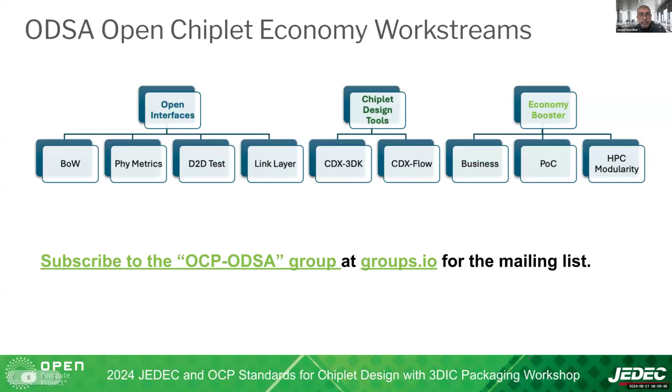As Jawad pointed out, CDX is just another work stream under the old ODSA or Open Chiplet Economy. So we're focusing on the standardizations. That's why we have this workshop, and we'd like to hear from everyone in the industry about the challenges that they're facing in the business regarding the standardizations, especially in the 3D IC design and also the chiplet.

Where they are getting to more like plug and play and a lot like sharing resources. So we definitely want to hear more from you about the challenges today. We already have the CDXML, the standard, which is incorporated with the JEDEC part model, JEP30. We're also working right now on the material design and also assembly design, and also like the testing design kits.

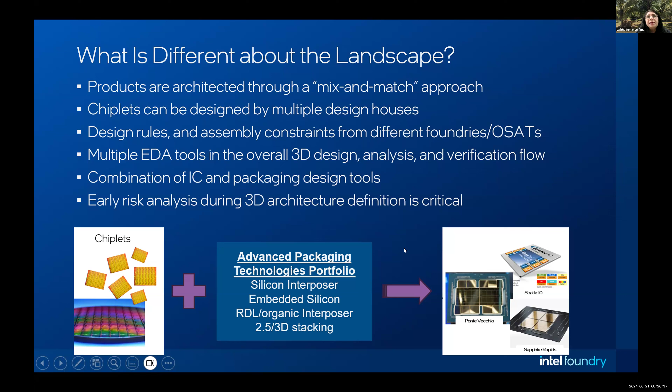Way before you get into an execution phase, you need to know, hey, am I meeting the performance criteria? Am I not? I need to make sure that the package costs are less. How am I going to test this whole system? So that's where, with chiplets and the advanced packaging portfolio going towards really generating products, the landscape warrants a different kind of mindset in the industry.

So what are some of the challenges, right? Disaggregation strategy. How do I partition? What silicon nodes do I pick? Die-to-die IP, which die-to-die IP? You mentioned several names, right? Is it UCIe? Is it certified on a bridge or on an interposer? What are the bump pitches and decoupling capacitance aspects I need to worry about? What packaging do I need to choose?

This phase of planning is where, I have to say, this has been a pitch I have been doing for the past decade. We have come some ways. I have to thank the EDA partners that we work with. They have come a long way in terms of putting together some co-design planning systems, some great multi-physics changes have happened in dealing with the complexity and scalability, but still, there is a lot of custom engineering.

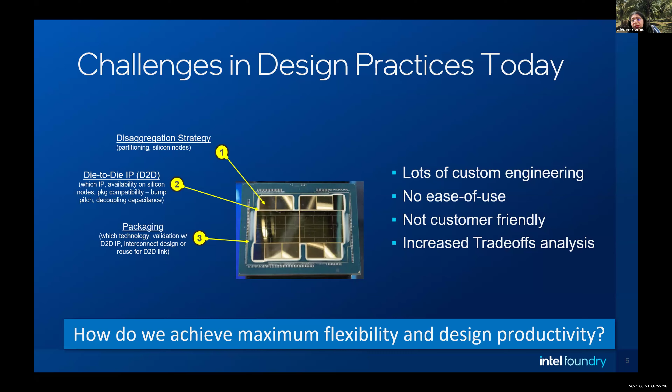We really want some kind of a 3D IC design enabling kit that comprehends the technology aspects and gives us a reference flow so people can use it. I think we need to compete on coming up with optimum architectures, not on the standards. So the emphasis on trade-off analysis also increases. So how do we achieve maximum flexibility and design productivity without impacting the timelines? So this is what I think should happen, right?

Right here to the left, I'm showing an example. I think this is PVC. Look at it. It has 47 pieces of silicon in one package, 3 foundries, 5 silicon nodes, and you're looking at the transistor count, fairly complex.

So to enable a lot of things like this, whether it's AI or HPC segments or even co-optics, for instance, we need to have a very nimble co-design system that drives integration amongst the die, package and board design tools. The design kits should have an end-to-end focus. We need to stop paying myopic attention to each area.

At a holistic level, we need to know that, hey, even before I start doing my floor planning or taping in the package or the board, I can come up with an optimum architecture bearing the signal integrity, power delivery, thermals, warpage, and what form factors can I even afford? All those trade-offs need to happen in this co-design system.

And then comes the burden on the ecosystem and standards. All the standard IPs, whether it's a bunch of wires or UCIe or anything else, need to be validated and standardized for the packaging technologies that are being leveraged within the industry, right? This can be die-to-die, this can be off-package IP, advanced packaging, and EDA should really move to CAD-agnostic standards, right?

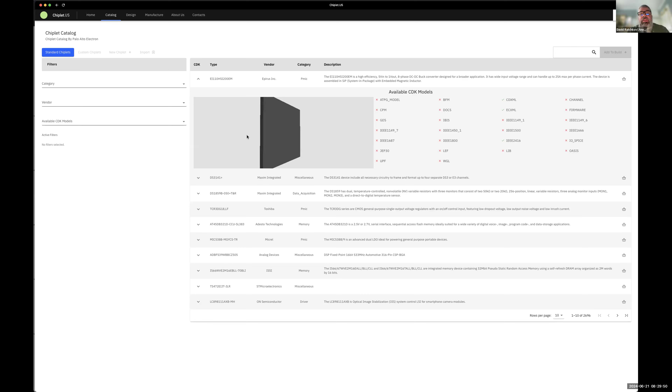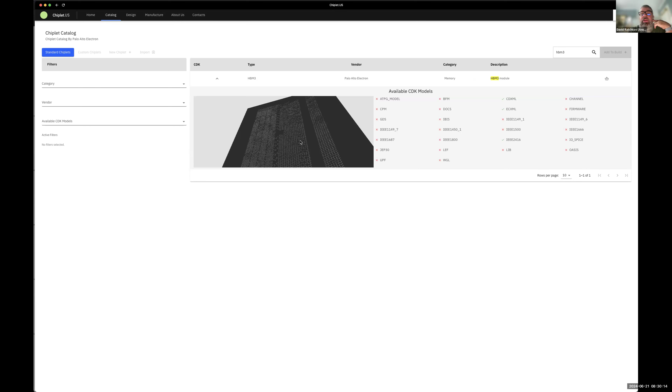Here is our website. And most importantly, we have a catalog of chiplets. There's standard chiplets and custom chiplets. If we look at some of the interesting chiplets, here is an IVR from a partner company that supplies integrated voltage regulators. Another cool example is an HBM3; this model was created by Palo Alto Electron, and you can see we have all the details for the HBM, and you can come in and actually use this. And you can publish. So again, please join us if you're interested in this. It's straightforward, it's free, and we would like to work with you.

This is where the top of the ecosystem is: the availability of chiplets and the ability to find and integrate them together. Next, you're going to be working with several different things. One of the most important pieces of data that you would need is what materials you are going to be using, especially for your substrates, any attachments, things like that. You would need to work with materials. So for that, we have actually created at Anemoi Software a material design kit that looks like this.

It's free to sign up here, and you can create your own libraries. The coolest part of this is you can actually share this with friends. One of the most difficult pieces in materials is that you always have to go and dig up a PDF file and then pass numbers by email to somebody and try to enter them in a tool. This kit here would allow you to just share the materials. And most importantly, if you use the material and you change something, we can warn you that something has been changed.

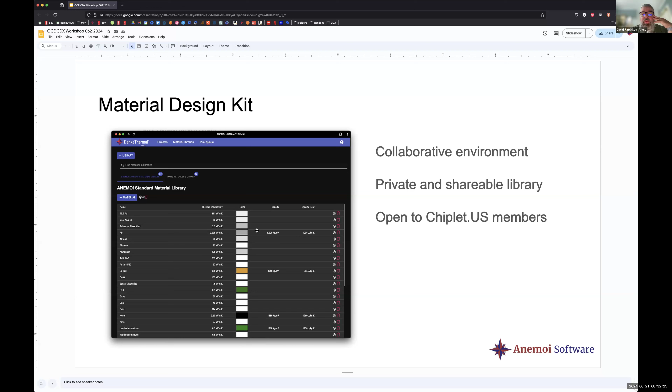So you are on top of any changes and you don't use any stale numbers. So material, James and team have been working on refining the definition of material, of what's in the material design kit, and we are implementing those changes. So again, this is open to Chiplet.us members. It's free. We would like to enable everyone to use the same values, right? So that we can reduce any possibility for mistakes.

Next, when you're looking at a top-down system, you are going to be looking at the physical aspect of this. How do I place these things together, and what will happen when they're together? What would my thermals look like? What would my mechanicals look like, right? Would that work together at all? Can I place them? And for that, I'll show you a live demo of the same tool.

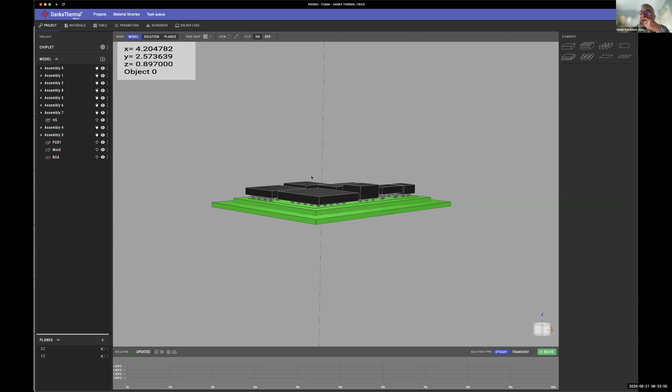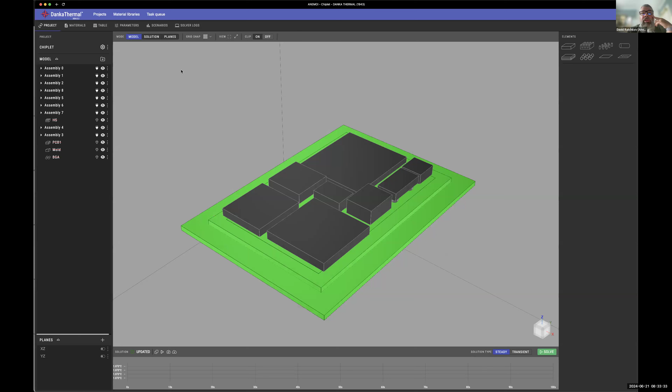Here is a simple chiplet system that was designed, right? We can look at the Z heights, we can look at the BGAs, we can go and create that very easily. Again, this is standard file input output. So even if you come in and just create this, you can always get standard ECXML out of this, and then you can go into any other tool which you want. Again, open standards are the key for an open chiplet economy. So we are determined to support those.

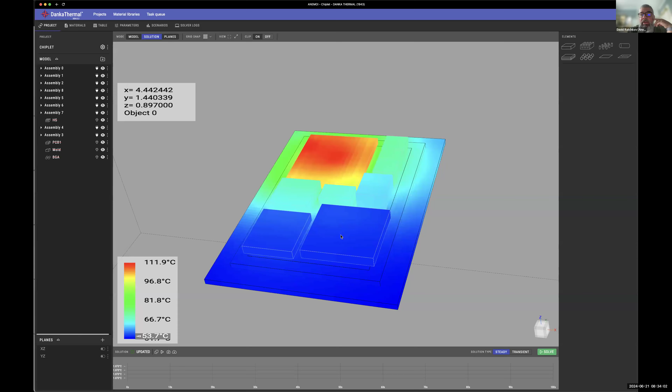And then you can look at the thermals from different points of view and see how things are coupled thermally, where the hotspots are, how the heat is propagating to other components, and so on. You would get different components with different ratings; probably the best example is memory modules, which would have a different rating than the standard ASIC. So you need to be concerned about how heat is propagating to those components, and then figure out the rest of the system. What does the heat sink look like? What would serve my thermal target? And look at the BGAs and so on.

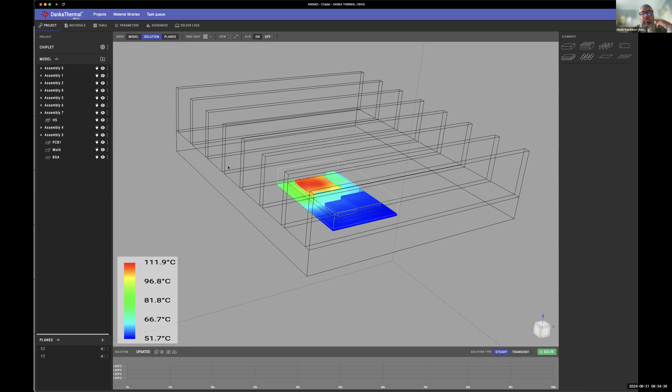So, okay, switching gears again. I have very limited time. I wanted to talk about the other aspect of this. Okay, so we can get chiplets, right? We can take a look at the available chiplets. We can take a look at the 3D system, but how do we create chiplets? How do we insert our chiplets into the system? And for that, excuse me,

again, this is a top-down approach where you would come in and define your system. You can create your system netlist. You can create your system supplies, power supplies. You can create your system power vectors, what is on, what is off. That will give you immediate feedback on total power. And total power includes all chiplets in different states. It would include any IVRs, everything. One of the underappreciated aspects of this is the power losses on the IVR and calculating those for a specific vector. That's not easy today if you're using PDF files as your source.

Instead, we have an electronic model that can automatically compute your losses depending on what the power vectors are on the loads, basically on the different chiplets. You can take a look at your system power, and then most importantly, you can take a look at every chiplet. What is the power distribution map, and take that into thermal simulation and see both spatially and temporally how heat propagates. And here's the same live example that I was showing you.

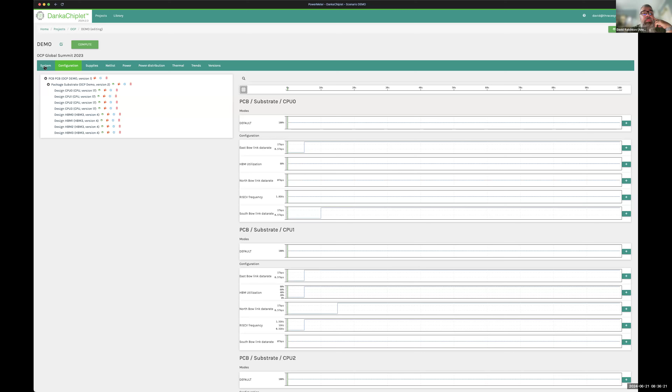Here is my system with the CPUs and the HBMs. Here's my power vector that I have defined that I'm looking for power for. Here's what my supplies are doing, right? Depending on if you would be doing DVFS, no question about it. But specifying what the voltage levels are at different points in time is important. Then you can take a look at what is your netlist.

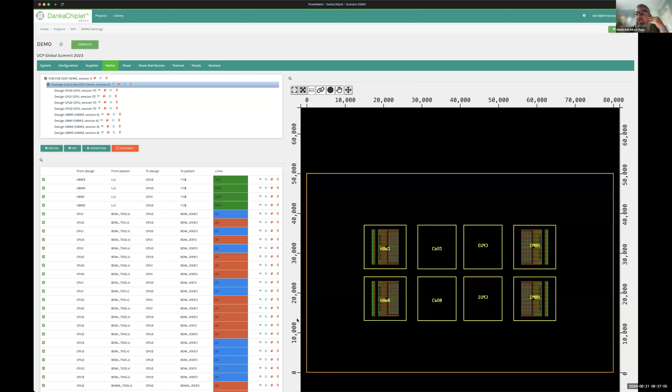Creating the netlist: the standard way to define package connectivity is Verilog, and creating a netlist for hundreds of thousands of nets by hand is a crazy proposition. So instead, we have automation that would enable you to create the netlist in very few commands. In this case, as you can see, in a few commands here we'll be able to create the top level netlist for the HBMs and for the CPUs.

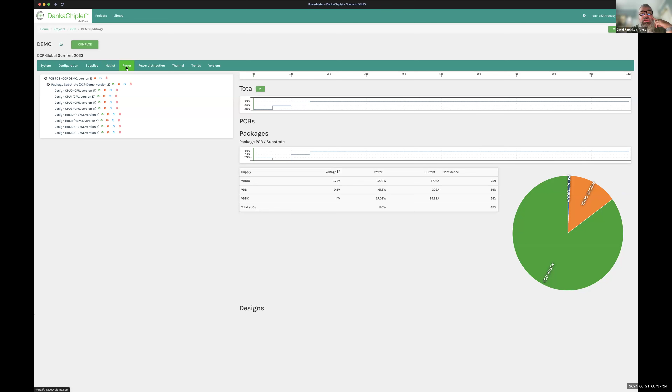And then having that netlist, we'll take a look at what the power is. And here, if you take a look at this, here's my power distribution map for this chiplet. Here's the power distribution map for the other chiplet. Again, if you notice, the power density is different in the two cases. That's because the two chiplets are executing different power vectors.

So this is one aspect. Okay, so we have defined, right? We went top down. We looked at what the chiplets are. We looked at the mechanical. We looked at thermal. Then we defined our system. Then the next aspect is, how do I go inside the chiplet and define that? And for that,

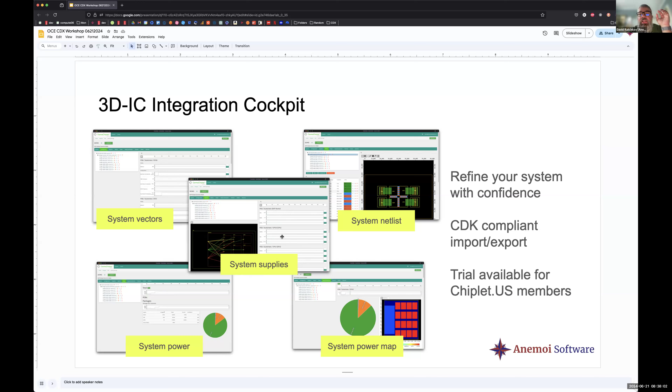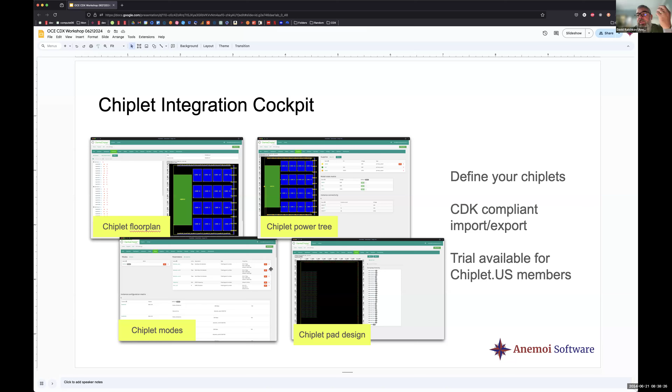as continuation of the same cockpit, you can actually dive down and define your full hierarchy of the chiplet, define what your floor plan is, define what your chiplet level power tree is, then define the modes, and actually look at the pad design as well. All of that comes into one cockpit that would enable you to go and define chiplet like this.

Here is my CPU chiplet that I was just showing you. Here is the floor plan for this chiplet. All the instances which are in there. You can see we have BoW interfaces on the sides. We have the CPU cores in the middle, and we have the HBM PHY on the side. We can define any power for the top level chiplet. Again, the lower level blocks in the chiplet, power is going to come from the model for that particular IP.

We can take a look at the power operation, the mode of operations for this chiplet, what it does in different states. This gives us the high level representation. We can take a look at supply connectivity, right? Which IPs in that chiplet are connected to which supply, so that we can generate correct per supply power and current waveforms for every vector.

Part of the CDK is being able to provide, right, to generate the substrate level netlist, you would need the pin definitions. So we can handle the Verilog. All that comes from Verilog. And then the Verilog, at least the boundary Verilog.

How much time do I have, James? You have 1 minute remaining. Okay. Yeah.

Okay, so we use the boundary Verilog, standard part of the CDK. Then we can come in and define the bumps where they are. Again, this is in fully hierarchical fashion, so you can move things around. So this is our cockpit, and actually perfect timing.

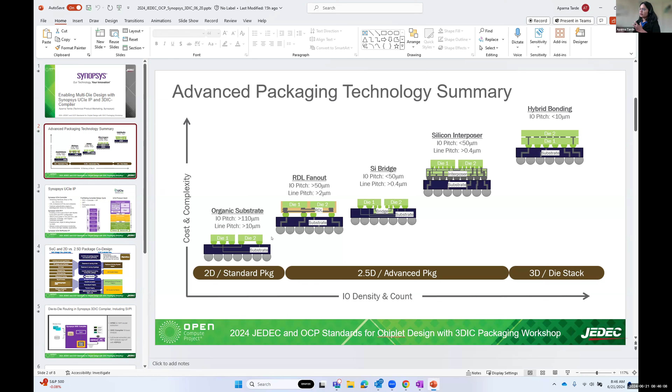So we have been used to the traditional flow of die design, like a single chip, where you have the architectural specification, you have to design, verify, synthesize, floor plan, power plan the chip, create placement and routing, and then of course have the DRC and layout versus schematic tested to sign off the chip.

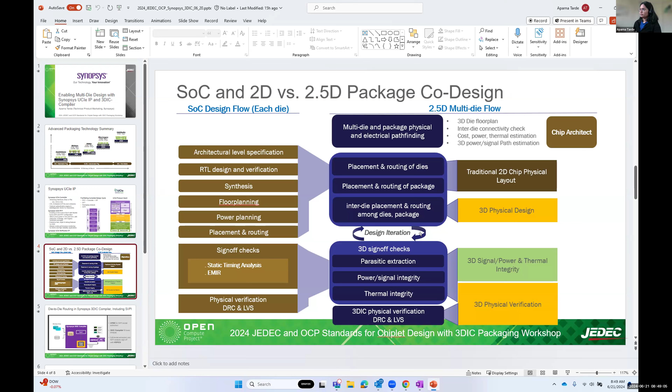You went through all those challenges that are involved in the whole process here, and there are a lot of different engineers involved, different teams with different expertise, from package design, layout, connectivity. Everyone comes together to hold this tremendous task, push it out of the door. Our Synopsys 3D IC compiler tries to optimize these tasks and automate it and help this process to be much smoother with respect to the design flow, right?

The 3D IC compiler takes multiple die inputs in the form of LDA, NDM, LEF, DEF files. It takes the bump maps for different dies and IPs, and then tries to create a unified flow with the NDM database, which then can be used for an advanced package, like with an interposer. You can initialize, give parameters for the interposers, then initialize these dies on the interposer, try to connect them. You can add dummy dies if your design needs to, and then you can export parameters from this whole layout,

which our HFSS tool tries to extract the S parameters, extracted models, and these can be used as an input to the HSpice tool that Synopsys has to run signal integrity, power integrity simulations on the whole package, so that you can look at if your design metrics have been met, if there are any hot corners or routing congestion inside the package anywhere, and try to resolve those issues and mitigate risks early on in your design cycle.

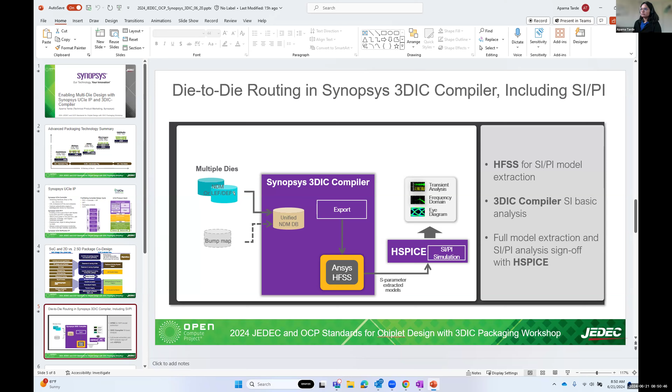This is one of the snapshots from our UCIe IP interposer design layout, where the 3D IC compiler is capable of doing automated routing throughout the package. And this is one of the automated routing snapshots of the compiler. And it does the sidewall shielding as well as interlayer shielding. It achieves close to 100% routing density with custom shielding patterns, and boosts the package design productivity a lot.

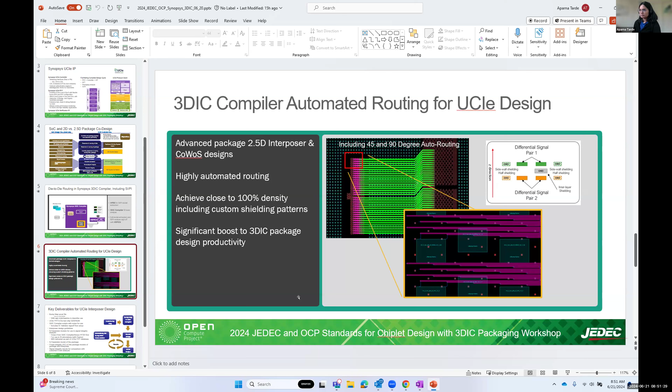As a conclusion, I would like to note that for our UCIe IP deliverables, we not only test our GDS for the IP independently, but we run through this whole flow of trying to package it together inside an interposer package and try to see if everything is meeting the design expectations.

We deliver the compiler scripts that are required for the IC Validator sign-off flow. We also deliver the interposer design guidelines. We have the S parameter models that can be used for signal integrity simulations.

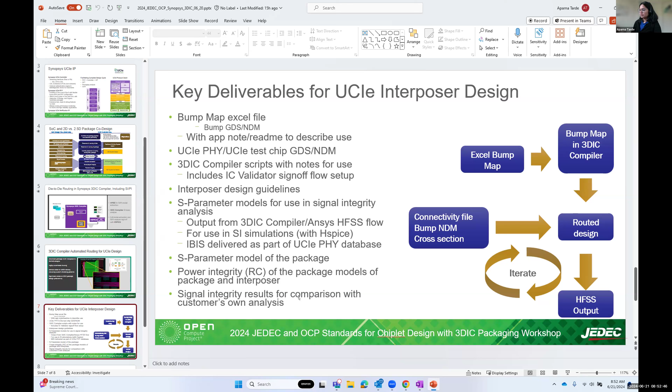We have, of course, the IBIS models with the UCIe PHY, and we run and deliver the power integrity, signal integrity analysis so that customers, when they embed our designs into their whole SoC, have something to compare to and see what design metrics and margins can be met with respect to the IP, and try to resolve the overall system productivity with it. With that, I would like to conclude my presentation. Thank you, OCP and JEDEC, for this opportunity to present here, and you can reach us out on our website if you're interested. Thank you.

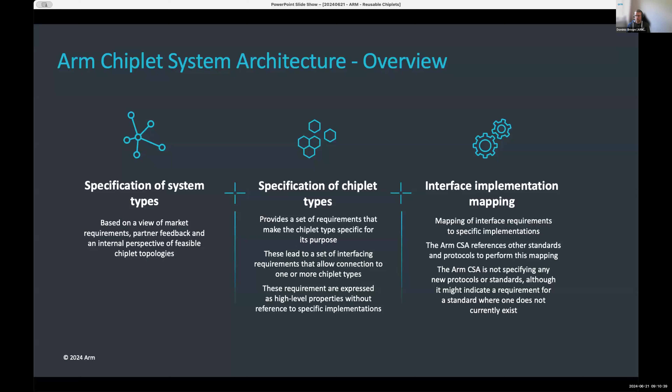Okay, cool. Yeah, so that indicates where there might be something remaining that needs to be done, and that might be taken up by ARM ourselves, or we might be driving that within industry standards.

I hope I made that within the minute. Thank you, I think, for the wonderful presentations.

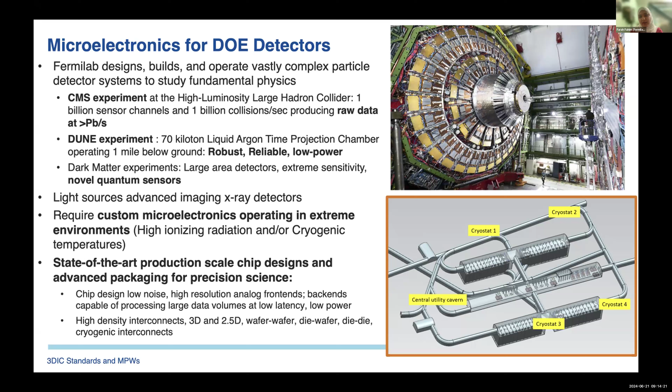And there are many such experiments that are done within the DOE complex. To name a few, there are these advanced light sources that are deployed, which have all types of imaging X-ray detectors, which are used for material science and, for example, drug discovery and identifying protein structures and the like. One of the key aspects of almost all of these different detectors is that they operate or require custom microelectronics, which operates in extreme environments.

So this is either high ionizing radiation and or cryogenic temperatures. And again, to give you a scale of the ionizing radiation, we are about 1,000 times more ionizing radiation than you see in space. And to top all of that, I think most of these detectors, once they have been deployed, you don't have access to the electronics for the length of the experiment.

So the electronics that is deployed in these situations have to be extremely robust and operate in these extreme environments for about 10 to 20 years without any access to them, while they are doing state-of-the-art functions and giving us information which we need to validate very, very quickly. So that's just setting the scale over here.

So once in a while, every 10 years, the community, not just the high energy physics community but most of the DOE community, gets together to come up with what are the next experiments or the next decade of physics that we would like to focus on. Such an exercise just happened last year, and we created what is called a P5 report, a prioritization panel report. Essentially, the report identified that the current detector instrumentation technologies have already pushed the boundaries of sensitivity and scalability to their limits, and new technologies are needed in order for us to be able to cope with the experiments that are being proposed.